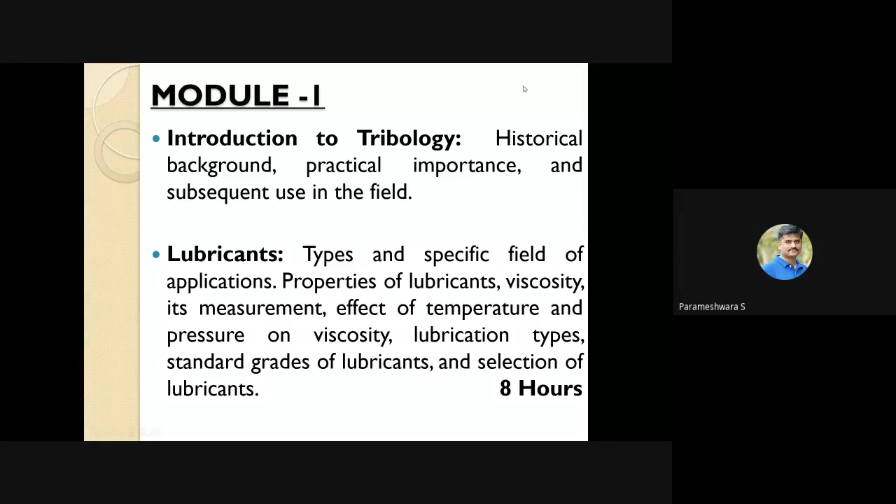This topic comes under module one. Here is the history: the history of tribology goes back to the era of Leonardo da Vinci.

Leonardo da Vinci lived from 1452 to 1519. He deduced a scientific approach to friction and postulated laws governing the motion of a rectangular block bearing over a flat surface. However, this work remained unpublished for a long time due to non-availability of publishing media.

Later, Guillaume Amontons rediscovered the laws based on Leonardo da Vinci's hypothesis. His first finding was that the friction force resisting sliding at the interface is directly proportional to the normal load. The second finding was that the friction force does not depend on the apparent area of contact. These were the two findings of Amontons based on Leonardo da Vinci's work.

Then Charles Augustin Coulomb verified Amontons' laws and added a third law: the friction force is independent of velocity once motion starts.

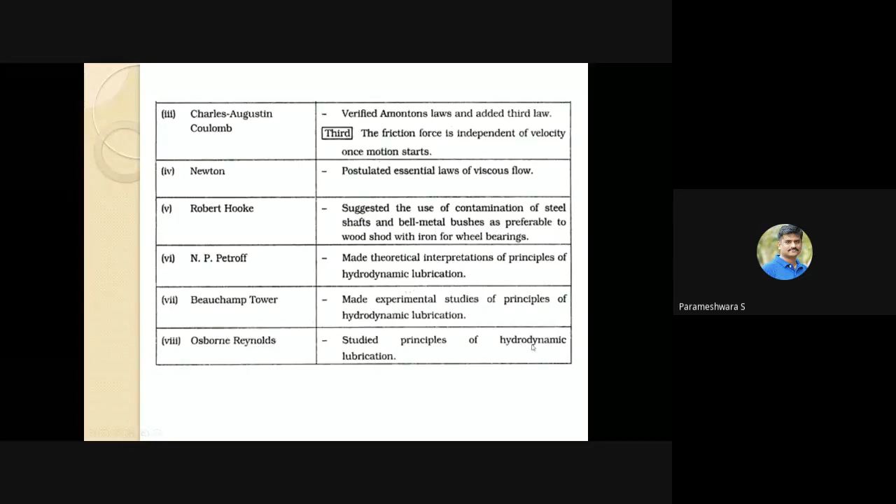And the historical background. How did these tribology concepts evolve from the ancient ages? We shall see that.

It goes to the year 3500 BC to 30 BC, the age of Sumerians and Egyptians. Simple bearings for kindling fire and for drilling holes with rotary motion were developed, and pottery wheels with wood and stone bearings were used in those days. Axle bearings with leather loops for rolling and wheeled vehicles were used, and lubricants such as oil, grease, and in few cases water were used. The oil and grease in those days were natural, derived from animal or plant sources.

These kinds of lubricants were used by those people, and for building sledges for transporting heavy stones. Several Egyptian reliefs depict the transport of huge stone blocks designed for construction of monuments, like the pyramids you have seen, and these were slid on tree trunks rather than rollers.

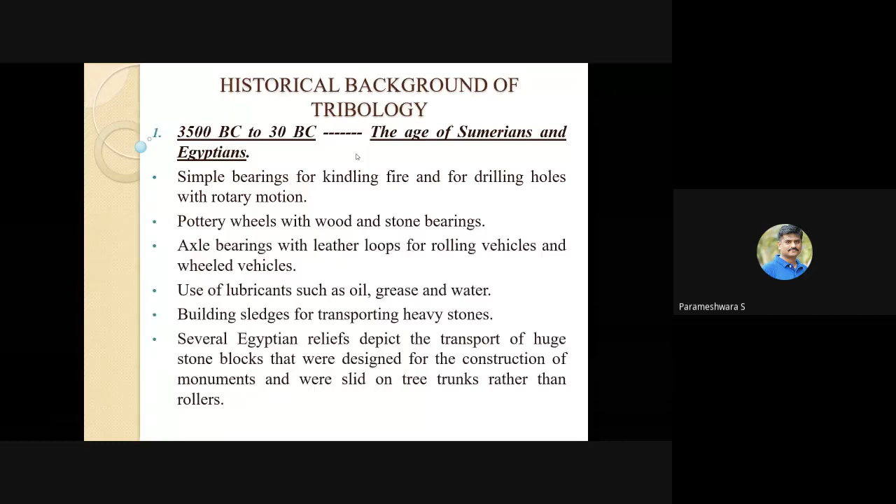So tribology concepts were part of life since the human evolution took place, and nowadays it is even more relevant.

In the year 2000 BC, during other historical epochs, mainly vegetable oils and animal fats were used as lubricants and anti-wear agents. Normally, what is the role of a lubricant? It is to avoid or minimize friction, which in turn minimizes wear loss, and ultimately enhances the lifespan of the machinery or component.

However, it is fair to assume that bitumen, oil seeping out of the ground, was used to a certain degree since antiquity. With the advent of petroleum, lubricant usage took another direction and became significant. Even nowadays, the lubricant industry contributes greatly to the GDP of countries. If you go to the Gulf, oil and lubricant are their main source of income.

Even around 650 BC, the earliest documents mention the use of wheels to reduce friction. This was the first time, in 650 BC, before Christ. So even in BC times, people used lubricants to minimize friction in wheels.

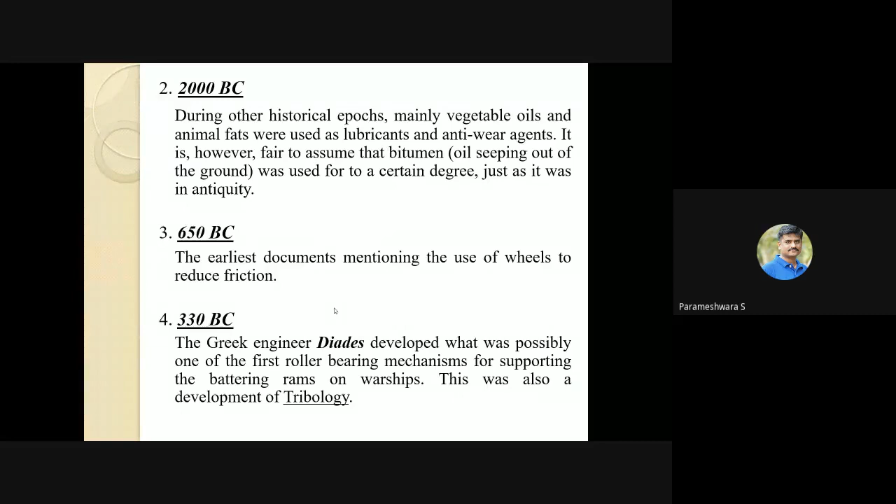Between 50 BC to 50 AD, the Romans left remains of a rotating platform originating from a ship of Emperor Caligula, which was found in 1930 at the bottom of Lake Nemi, showing that rudimentary bearings have been used since ancient times. This platform can be viewed as one of the first examples of thrust bearings, which carry load along the axis.

Take the example of a shaft: it is considered a journal in case of a journal bearing, which takes load perpendicular to the axis of the shaft. In thrust bearings, the load acts along the axis of the shaft. So those kinds of bearings are called thrust bearings.

Leonardo da Vinci, 1452 to 1519 - scientific examination of tribology began only in recent history, beginning with da Vinci, who in 1500 studied the problem of friction by examining the coefficient of friction, that is static friction, on an inclined plane. Da Vinci determined the value of the friction coefficient to be one-fourth, and formulated the laws of dry friction. Later, Coulomb friction and other concepts came into existence, but da Vinci worked more on dry friction.

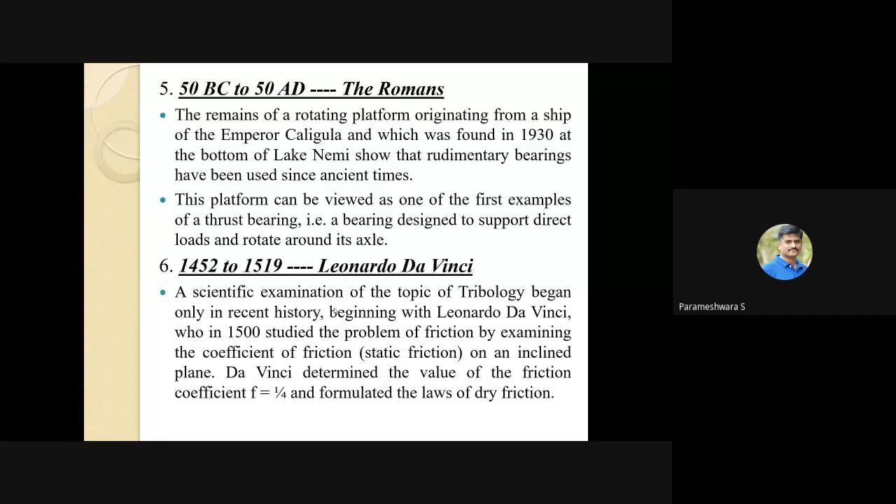He also studied friction on horizontal and inclined planes, as well as wear on slide bearings, and the results of these investigations became the first and second friction laws.

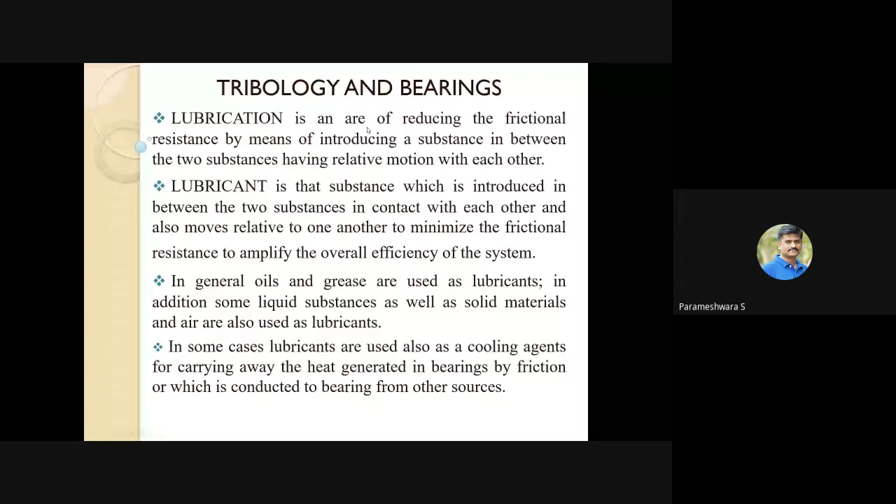Modified the rolling bearing by almost entirely replacing the moving coupling between the two parts with a mechanism with reduced rolling friction. Between the 15th to 16th century, the Renaissance took place, and this marks the beginning of tribology as a discrete field. A basic understanding of friction and wear was developed, but no new developments in lubricants.

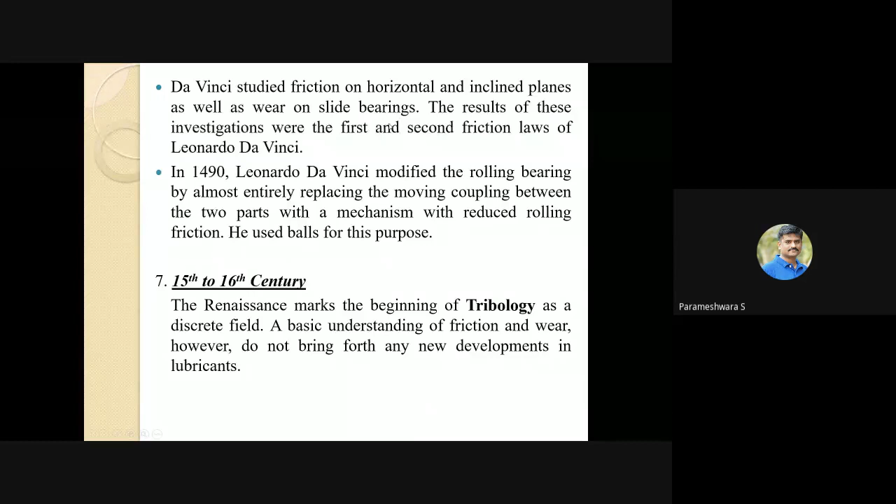From 1663 to 1705, Amontons, a French physicist and governor of Lille, conducted research in the area of mixed friction and found that friction force depends on normal force, and that surface roughness must be regarded as a cause of friction. He found that surface roughness contributes a lot to friction, because the smoother the surface, the less the friction.

During the first class itself, I had demonstrated how surface friction becomes a boon sometimes and a bane at other times. That was the study done by Amontons.

Later, from 1683 to 1744, John Theophilus Desaguliers, a French natural philosopher, developed a tribology model to explain friction and attributed it to the influence of cohesion and adhesion. He found that higher frictional force occurs on better polished surfaces, and showed that two well-polished lead bodies pressed firmly together could only be separated with a surprisingly large force. This was the finding of John Theophilus Desaguliers.

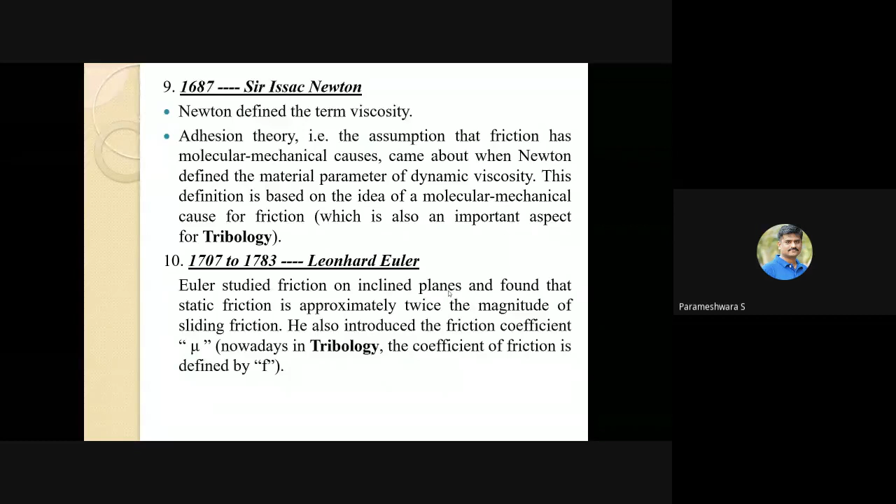Then Charles Coulomb's theory. Coulomb, between 1736 and 1806, continued to develop the basic ideas of Amontons in terms of surface roughness and mixed friction. He also examined the relationship between the necessary horizontal force and the weight percentage, both important terms in tribology.

According to Coulomb's model, the friction coefficient of a given surface does not depend on the load; the friction force is proportional to weight. Furthermore, friction is independent of surface area, because it is only a function of the mean angle of incline of the roughness. These were the findings of Coulomb between 1736 and 1806.

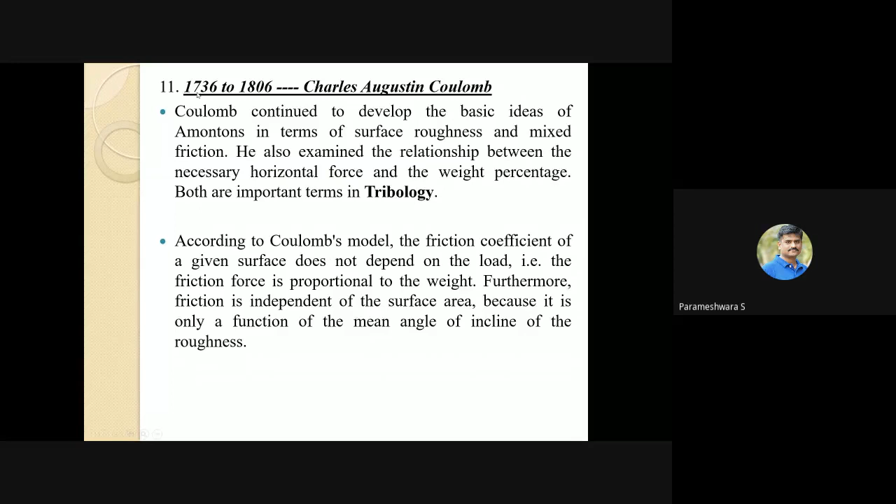Then in 1794, Philip Vaughan, from Carmarthen, an iron founder, invented the ball bearing in 1791. This ball bearing is a kind of anti-friction bearing, because the contact surface between the ball and the race of the bearing is just a point.

Whereas in case of a roller bearing, it's a line contact. So both the ball bearing and the roller bearing are called anti-friction bearings, since the friction in these cases is very, very much less compared to a slider bearing like a journal bearing. He invented the ball bearing in 1791, and you can see it used in cycle wheels and even two-wheelers.

You have seen that there is a bearing race, two races, inner race and outer race, and between them the balls are kept; these balls roll as the wheel starts rotating. It was patented in 1794 by Philip Vaughan. In the 18th century, the mechanism of the rolling or anti-friction bearing was reinvented in England, when an axle for horse carriages was fitted with a ball bearing ring in semicircular partial grooves distributed over the axle.

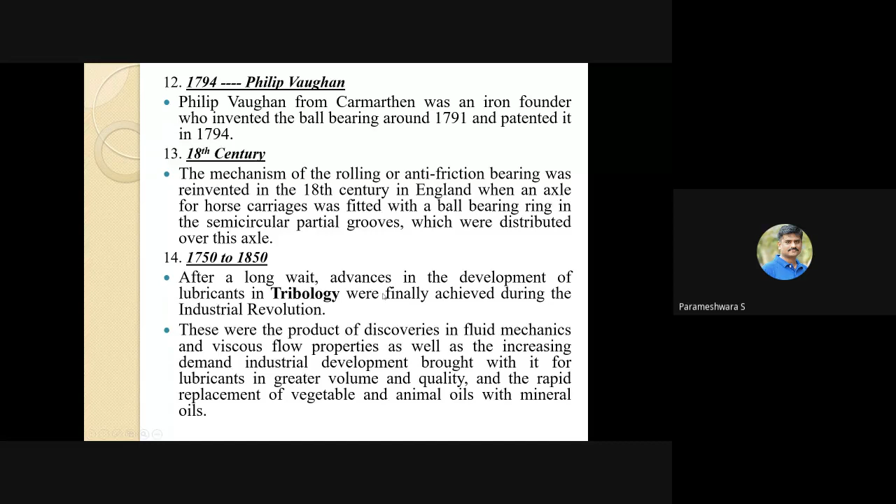And in 1802, Cardinet patented a tapered roller bearing. So line contact only, tapered. This bearing can withstand a great deal of stress in both radial and axial directions. In general, it is installed in pairs. Two bearings are positioned opposite to each other, as the bearing consists of two separate elements: the inner ring with the roller elements, and the outer ring that forms the bearing shell. That was the contribution of Cardinet.

In 1859, E.L. Drake drilled the first oil well. And lubricating components experienced a breakthrough in the 19th century during the course of industrialization. See, in industrialization the main source of power and energy was petroleum. So due to that, the world turned in a different direction. In most cases, the rolling elements are guided in a retainer, which keeps them a uniform distance from one another and prevents them from touching each other.

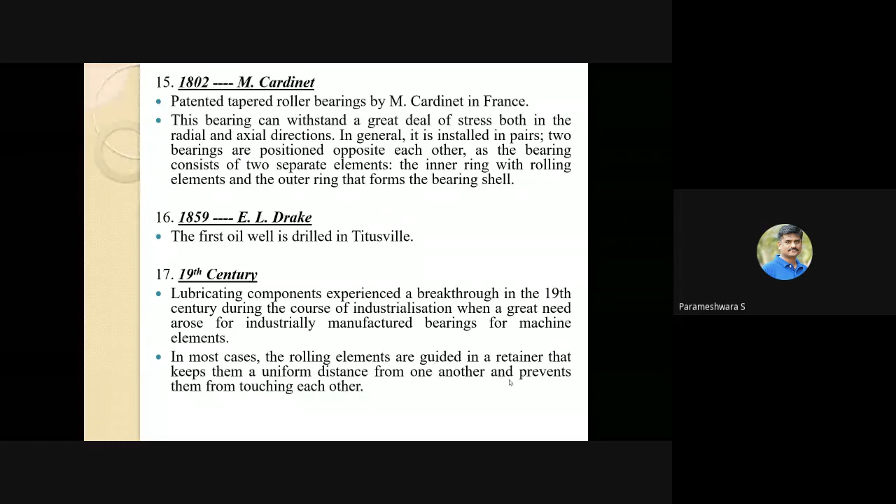So like that, next is 1850 to 1925. The period from 1850 to 1925 is regarded as a time of technical progress. The railways were the focal point of societal events, and the transition from solid lubrication to liquid lubricants occurred in the lubrication of bearings and slideways.

So 1925 and beyond, the actual age of tribology began after the First World War. High loads, speeds, and temperatures were accompanied by increasing stress. And after the Second World War, scientists found the solid lubricant molybdenum disulfide an exceptional lubricant for exceptional conditions, the perfect product for space research.

As an example of a solid lubricant, just take talc powder. When you are playing carom, in order to facilitate the smooth movement of the pawns, you put talc powder on it. So that again comes under that category. It's a lubricant.

So in 1966, the term tribology was mentioned for the first time. It was coined. Tribology: friction, wear, lubrication. These are the main terms associated with the word tribology. It was coined in 1966 for the first time by the Jost Report, a study commissioned by the British government to investigate damage from wear. And the report has since been referred to in connection with friction, wear and lubrication, the three important terms associated with tribology.

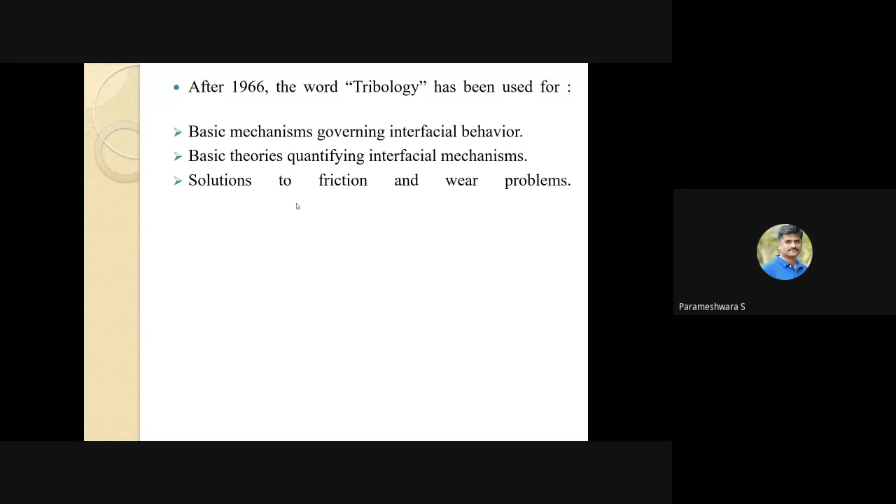And later onwards, I don't know which country it took place. Anyhow, I have that video. I will try to show it to you. After 1966, the word tribology has been used for basic mechanisms governing interfacial behavior, basic theories, quantifying interfacial mechanisms, and solutions to friction and wear problems.

So this is the history of tribology. Normally this question is appearing in every semester question paper. So just go through that; you cannot tell the story of all these things. It is left to you how you brief it up in the examination. You can make notes out of it. Anyhow, I have shared the notes regarding this. Just go on telling the findings of the scientists and physicists over a period of time.

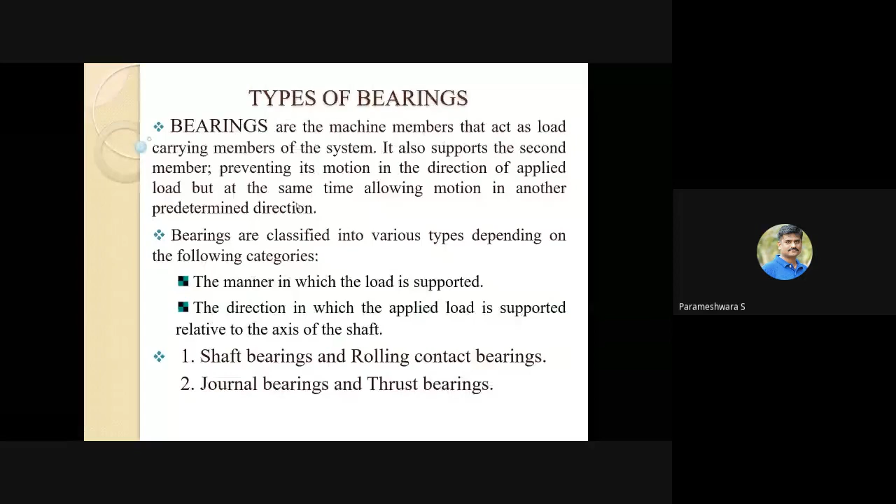Okay, with the video of the International Tribology Summit, I will end today's session. Just play that now.

History of tribology. In China, friction, the dominator of nature and our civilization. Ancient China made an important contribution to the development of tribology, from prehistoric times to Yellow Emperor's creation in the ancient Chinese era, from lifting water in the Shang and Zhou dynasty to the spindle recorded in Heavenly Creations, Tiangong Kaiwu. Humans have been exploring the friction phenomenon for a long time. The use of the law of friction is one of the signs of human civilization. The scientific exploration of the rule of friction is an important symbol in the development of modern science and technology.

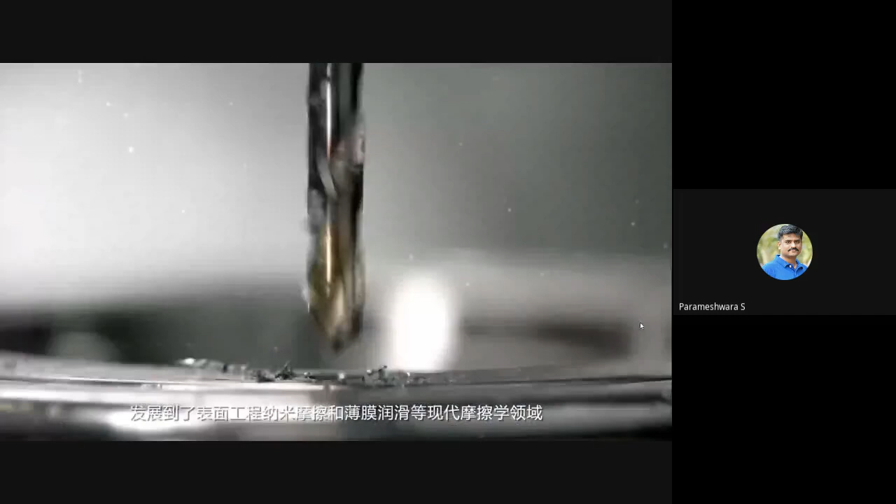From Leonardo da Vinci's solid friction experiment to Amontons' friction formula, from Charles Augustin Coulomb's classical law of friction to molecular theories of friction, from Kragelsky's molecular mechanical theory of friction to Frank Philip Bowden and David Tabor's adhesion theory of friction, from Beauchamp Tower's pressure test, the lubrication equation of Osborne Reynolds, the boundary lubrication model of William B. Hardy, the Stribeck curve, to elastohydrodynamic lubrication theory. From the definition of tribology by H. Peter Jost, the study of friction has expanded to the fields of modern tribology, such as surface engineering, nano tribology, and thin film lubrication. The development of these fields has played a significant role in modern industry. Through wide experiments and quantitative research, more and more rules of tribology have been found and applied. Tribology has become an important force to develop and create the future.

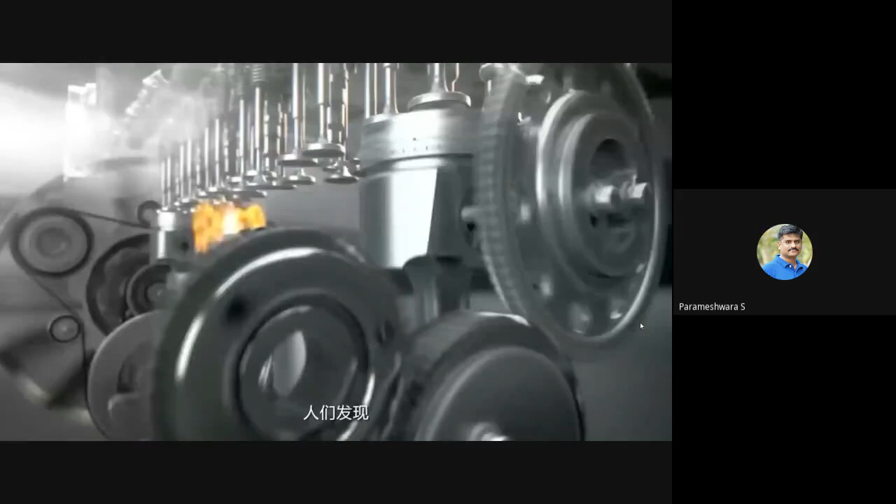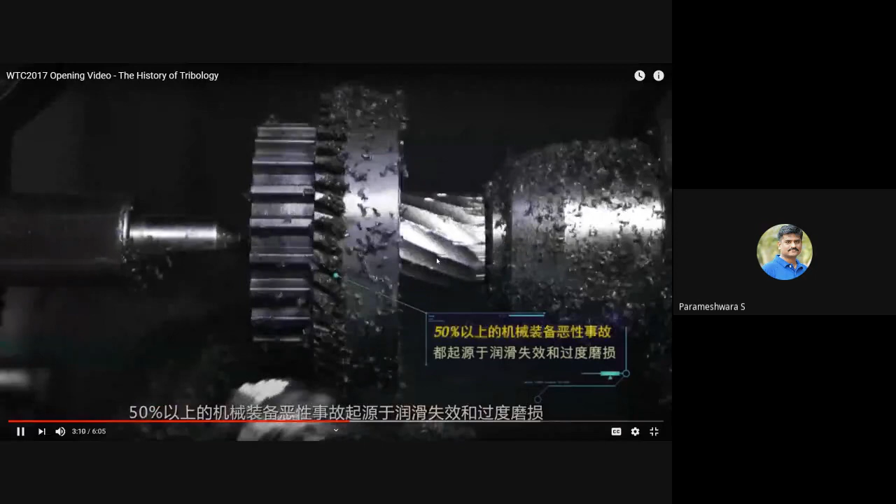Tribology plays a more important role in this highly developed industrial civilization today. It is found that 30% of the primary energy is consumed by friction all over the world. 50% of machine parts failure is due to wear. And more than 50% of vicious mechanical equipment accidents originate in lubrication failure and excessive wear. The continuous improvement of tribology is creating a more efficient, safer, and greener home on Earth. In modern times, tribology is increasingly applied to various fields, from aerospace to transportation and bridge engineering, and to ocean dive and deep earth exploration. Almost all of the world's super engineering is partly contributed by tribology.

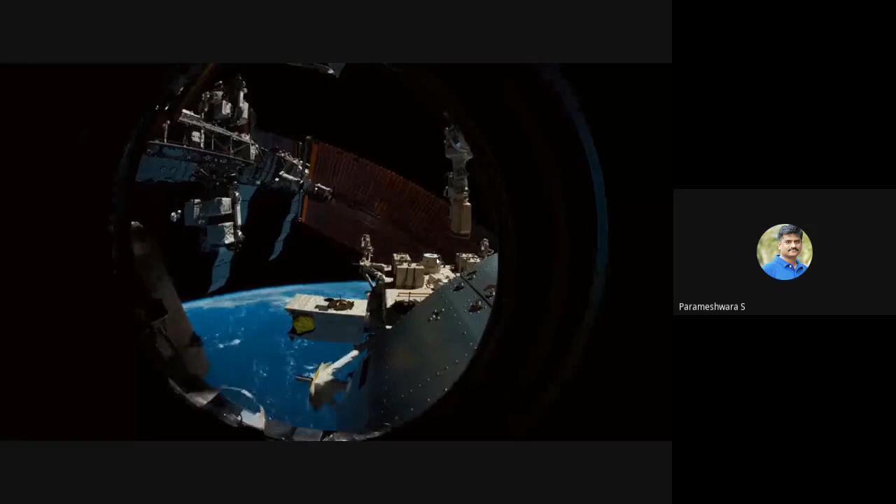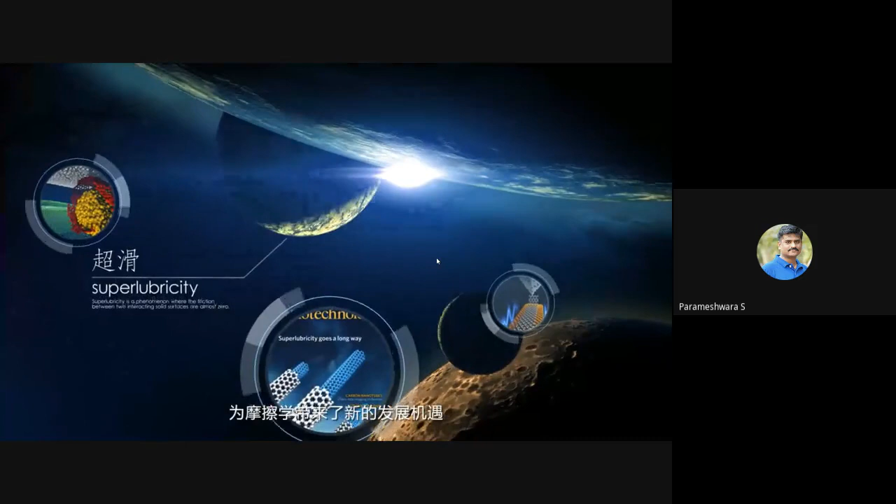With the deepening of study, we find that there are more mysteries for us to explore and discover in the tribology world. Nanotribology, biotribology, green lubrication, smart lubrication, and superlubricity have brought new opportunities for the development of tribology. We are pleasantly surprised, excited, moved by every exploration of new areas. We know that each step forward of tribology will bring more efficient production and a better life for human beings. We carry the mission to forge ahead and never stop exploring.